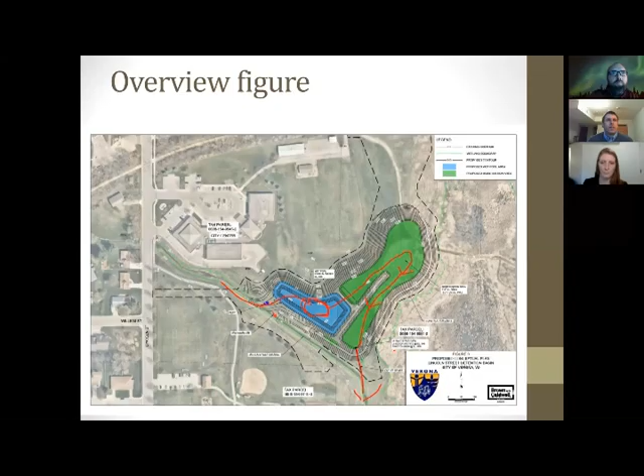So we can move on to the next slide. Again, just a bit of an overview: this is a water quality treatment facility. That's the purpose of the project, to remove stormwater pollutants. Associated with that, there is a grassed path that goes through the northeast part of the project area that will be rerouted as part of the project. So it will remain, it just will be rerouted. We'll get into a little more detail on that.

There will be some tree plantings, and the majority of the project area will be restored with native grass plantings. This is a picture of the project area from last spring, looking from near the outlet of the facility to the north and northwest. The city center building is in the background, the top right is where the Hometown Days area is, and the channel is on the left-hand side. You can see the majority of the project site is turf grass right now.

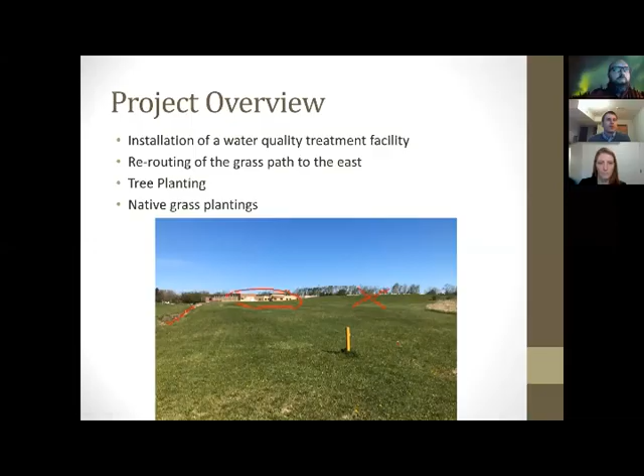This is getting into construction access and site access. One thing to point out, there's a thin blue line on the north side - that's the grass path that goes through the area. That will be diverted around the site during construction, with a construction fence along the edge of the construction site to maintain safety, and divert that path around the project area.

Primary access for the site will be off of Lincoln Street. That circled area will come from the west into the project area. There will be a decent amount of truck traffic hauling excavated material from the site and delivering material to the site, and that primary access will come from Lincoln Street.

There are traffic control requirements as part of the plans - signs, stop signs, signage warning of trucks entering and leaving, that type of signage.

There's also a secondary access coming from the north off of Verona Avenue and through the Ice Center area and across the Military Ridge State Trail. That secondary access is to be used in a more limited fashion, maybe some delivery of material, maybe some contractor pickup trucks, but it's not the primary trucking in and out access. There are traffic control requirements on that area, particularly with the Military Ridge Trail, to maintain safety. The goal is to give the contractor area to work and ability to get in and out of the site from both areas, but also maintain pedestrian and vehicle access.

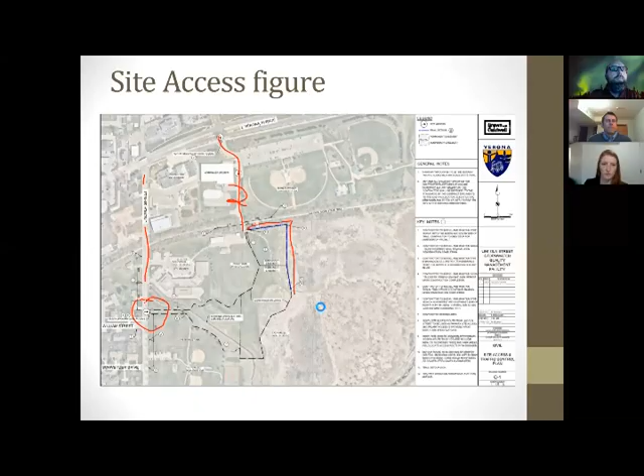Lincoln Street will remain open at all times. It is the primary access, and there will be increased truck traffic. It will be going up north to Verona Avenue and to truck routes from there. The secondary access is from East Verona Avenue and through the community park on the north side of the site.

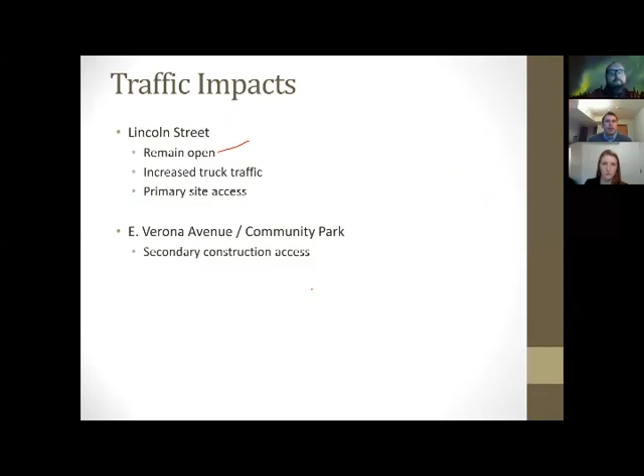Restoration: as mentioned before, there would be some trees, and the majority of the area would be native plantings - native grasses, sedges, wildflowers - using a couple different seed mixes. In the area around the perimeter of the wet pond, the water will fluctuate and it'll be a little wetter. That will be a floodplain, a wet mesic seed mix.

Similarly with the bioretention area, that's an area that will be wet frequently, and those side slopes close to the bioretention area will also get a wet seed mix, a floodplain seed mix. The upper side slopes, as you move up towards the Hometown Day grounds or up in elevation away from the project, would be a more upland prairie seed mix - like a woodland seed mix, a savanna seed mix.

Continue on. There will be tree plantings. This was coordinated with the city forester, and we identified areas along the north slope of the pond for tree plantings. There's several different species included in the plantings, both deciduous and conifers.

The next slide helps illustrate and tie that together. This just gives a real broad overview of the restoration, but the tree areas - there's 3 different groups of trees on the north slope, and those locations are identified there.

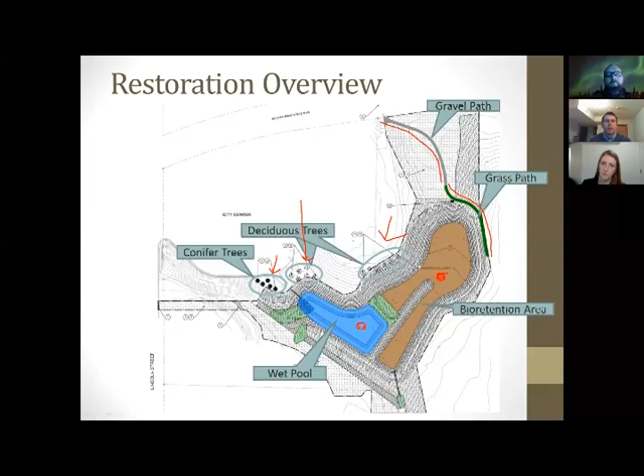Within the watershed, the city has done quite a bit of work over the last 10 years or so, including areas both close to the Lincoln Street project we're talking about tonight. The first two projects in the area were the Lincoln Street Channel Phase 1 and Phase 2 rehabilitation. Phase 1 occurred in 2013 - there's a picture on the top of the screen that's just downstream of the culverts at Lincoln Street, a picture from construction there. On the bottom of the screen, as you move downstream from Phase 1, going away from the city center and down towards Badger Mill Creek, that was restored and rehabilitated in 2017.

In 2018, the city did dredging at Silent Street Pond, and the design work for this project commenced. The design schedule has been a bit lengthy, and one of the real components of that is permitting with the Department of Natural Resources and the U.S. Army Corps. So I've worked through that and I'm excited to get to where we are today.

In the meantime, the city also did some other projects up at Gateway Pond with conveyance improvements. In 2019 and 2020, pond sampling, and also the dredging of Harmony Pond. Then we get to 2021, where we're looking at construction of this current project. The city will also be investigating Prairie Heights Pond and the potential need for dredging of that pond.

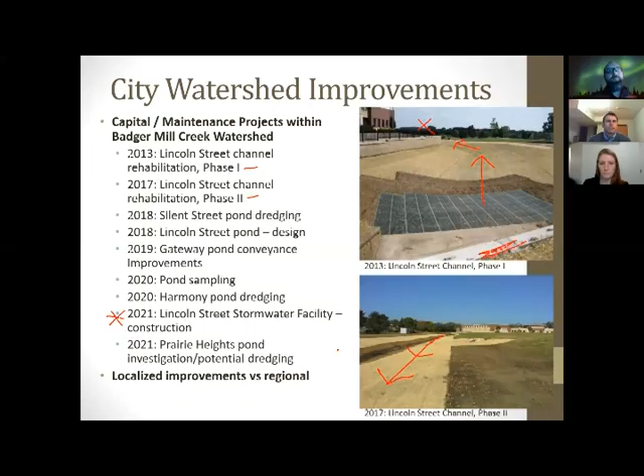Theron, if there's anything you want to add on projects in the watershed? No, that's a very good summary. The only thing I would add is all of these projects that Mike just identified are all within this larger local watershed that the city has, which is a figure Mike will describe later on. This is just the most downstream point in that watershed. But otherwise, that was a good summary, Mike, and I'll give you the floor, and here's the watershed figure for you.

So this is the project watershed, and Theron's circling the Lincoln Street detention basin location, draining to this area of about 700 acres of land, in that black outline. There are areas extending up north along Main Street, up to the Prairie Oaks area, the Reddan Soccer Complex area. So that water all drains down into the Lincoln Street Channel, and ultimately with the construction of this pond will flow through the facility.

There's also some of the downtown areas along Verona Avenue that will drain in there, extending west over to where the Sugar Creek Elementary redevelopment project's going on. So that's also part of this watershed. It's a big area that will drain into the project area, with a lot of runoff coming in and a lot of stormwater pollution that we can capture and remove. Also, a lot of areas within the city don't have stormwater treatment facilities installed currently, so that'll be a major benefit for the city and the environment and the receiving waters downstream of here, more specifically the Badger Mill Creek.

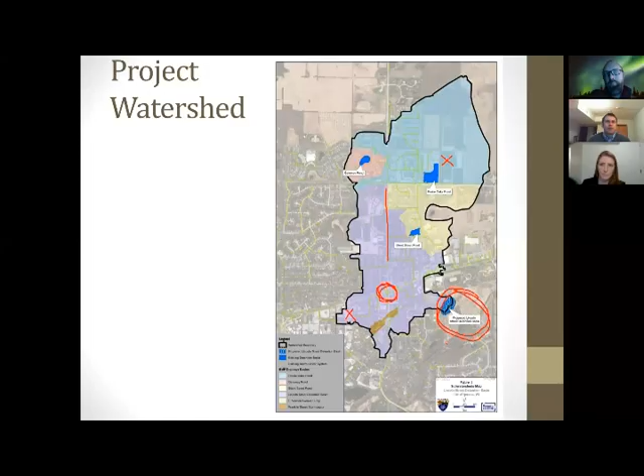So to start talking about some of those pollution control benefits, there are requirements for stormwater pollution control. People may or may not know that, but development requirements, both redevelopment and new development, have requirements to reduce the amount of total suspended solids leaving the site. Redevelopment, for example, would be a parking lot you want to reconstruct, or an existing commercial building you want to tear down and build a brand new commercial building.

And those sites need to look at and remove about 40% or more of the TSS from the site. New development is where you have a farm field or open land that's being turned into a new subdivision, a new business park, whatever you have. There's a higher requirement for pollution control there. There's not much undeveloped area in this watershed though; again, it is primarily developed.

One of the components that's somewhat special to this area, though it also impacts other areas, is thermal control. Badger Mill Creek and Sugar River are cold water fisheries. They support trout, and trout are sensitive to water temperature. What can happen with stormwater runoff is it can raise the temperature of the streams, and that can cause problems and issues with trout. So one of the requirements for both redevelopment and new development is to include thermal control, so there isn't a negative impact.

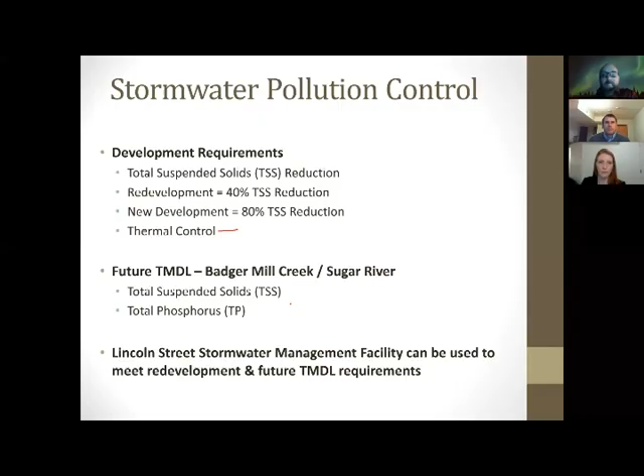So if we go on, what amount of pollution control are we looking at from this project, and how is it doing that?

So we have a wet pond, and in that wet pond there will be settling. The water comes into the wet pond carrying pollutants, and in that pool of water it allows the heavier particles to settle out to the bottom. That wet pool will have a depth of about 5 feet, with the first 3 feet being the settling area where pollutants settle out. At the bottom is the sediment storage area, which can accumulate up to about 2 feet of sediment. The city has been dredging some of the ponds that have accumulated sediment as part of ongoing maintenance. That's also a sign these wet ponds are capturing pollutants, settling them to the bottom, and taking that out of our waterways.

The second part of the pollution removal is the bioretention area. Water comes from the wet pond and flows into the bioretention area, where it can pond on top and then flow down and filter through that engineered soil layer, which is about 2 feet thick. Beneath that is a stone layer, and in that stone layer is a drain tile. So water flows through the engineered soil into the stone layer, gets collected by the drain tile, and goes out to the channel.

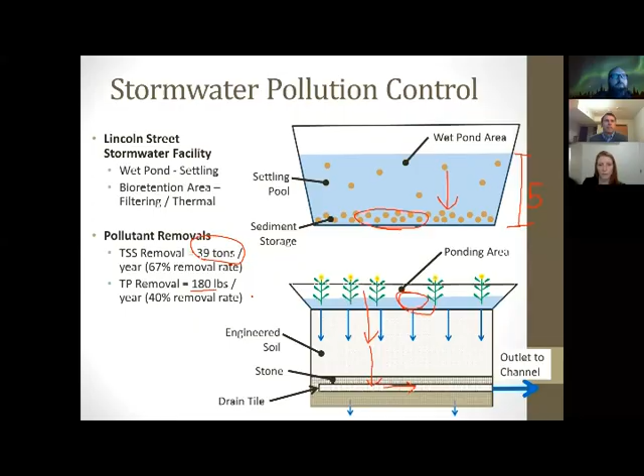So what are we looking at for a construction schedule? The bidding just occurred - we had the bid opening earlier today. So the city is evaluating those bids and will be awarding the contract in March. Then after that, having a pre-construction conference with the contractor, and from there moving into construction in April.

This schedule reflects our current thoughts, so the contractor might be moving into the in-stream work in the channel in July. This is dependent on their schedule, they may choose to rearrange the order, move things up or push things back, but that's what we're looking at. Ultimately restoration happens in August. The substantial completion date for the project is September 15th, so the contractor has to have the site finished up and can't push it too far into the fall. So we're looking at August and September for restoration of the site.

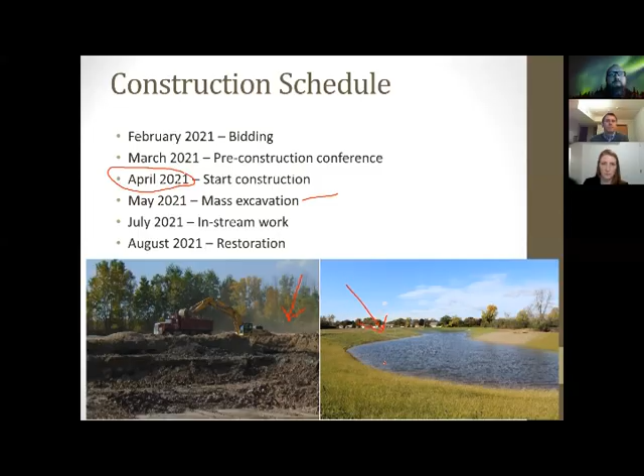And communication during construction - I don't know if Theron, did you want to cover that? Yeah, I can take the communication slide.

There is a project website on the city's website, and there's a slide for that. If there's any questions that anyone has during construction, contact city project staff, and Marty Cieslik is the primary contact - his information is on the website. So you just go to the City of Verona webpage, go to Government, Departments, Public Works Projects, and there is a Lincoln Street Stormwater Pond link. Click on that and there's a series of information and a figure of the project there. Once we have a more defined construction schedule, we will update that on the website also. And then I will also communicate with the Verona Press prior to construction starting about the exact date it will occur.

Otherwise, we will open the floor to questions for any of the attendees in the audience here. I'm going to take the pointer off so I can go to the other screen. Bear with me here, I'm moving my mouse to get to the other screen.

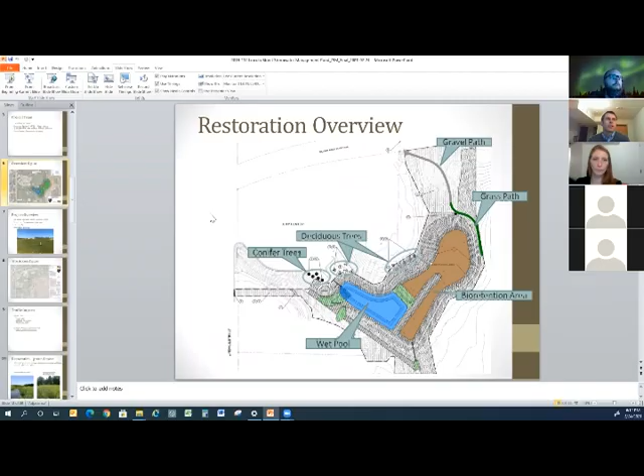So to the east of the site is lower, and there is a delineated wetland over there. That is taken into account on our project, and we are staying out of that wetland area. On this figure, there's a green line on the east side of the project, and so we're staying out of that.

You got the mic? Yep, okay, it does show. Okay, thank you.

Then there is a berm along the east side of the facility, and that was part of the work AECOM helped with on designing the project. That berm is designed to withstand the forces expected and to be constructed properly such that there isn't erosion, and it is stabilized.

To expand on that, regarding flood flows, there's two types of flow in flood events: an effective area and an ineffective area that make up the entire floodplain width. Your effective area is a positive velocity location where water is moving. Your ineffective area is where water has zero velocity - it's low-lying land, but the water elevations are high enough that it floods the land. The area adjacent to and north of this project is more in that ineffective area at the edge.

So the core of Badger Mill Creek for a large width has positive velocity moving water. If you were in a canoe or kayak, you're going to be moving with the water, but certain low-lying lands are just going to be flooded because the elevation of the water is greater than the land. Every scenario is different, every location is different, every storm event makes the flows different, but this is on a low risk end. There's no guarantees in stormwater, but it's about managing risks, and that's what we did here.